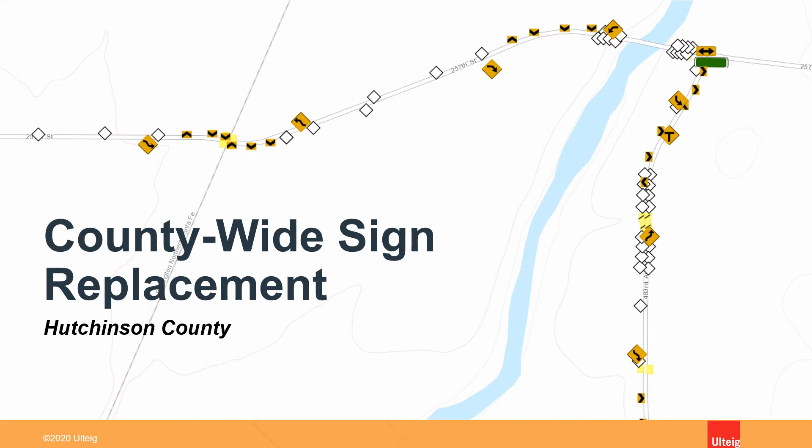Hello everyone, and welcome to the video presentation for the Hutchinson County County-wide Sign Replacement Project Kickoff. My name is Chad Stensland, and I am with Ulteig Engineers. We've been hired by the South Dakota Department of Transportation to administer and design this project.

What is the County-wide Sign Replacement Project? It is a project run out of the DOT Local Government Assistance Office in Pierre. It uses federal safety funds to assist local counties, townships, and towns in replacing and upgrading their existing street signs to current standards outlined in the Manual for Uniform Traffic Control Devices, also more commonly called the MUTCD.

The federal government mandated compliance with the MUTCD back in 2009, and all government agencies have been required to put in place plans to replace all their existing signs to follow new retroreflectivity guidelines. These new retroreflectivity guidelines improve roadway safety and, in turn, limit the liability of the county, towns, and townships.

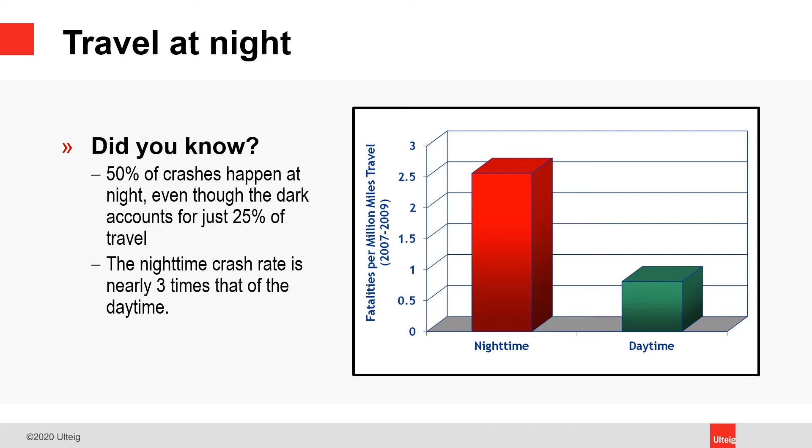Retroreflectivity is important because of the improvement in visibility at night. Although only 25% of travel takes place in dark conditions, 50% of the crashes take place in the dark. Improvements in retroreflectivity can contribute to increased safety for drivers. Retroreflectivity is the property of traffic signs that reflects light back to the driver. The higher the retroreflectivity of a sign, the easier it is for it to be seen from farther away.

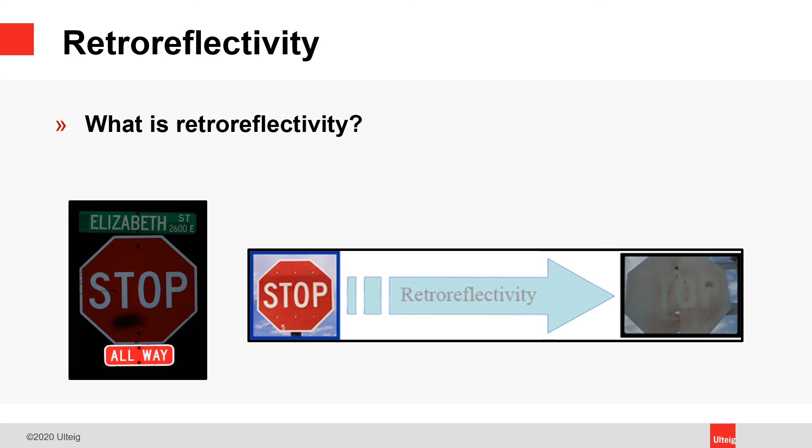As part of the South Dakota DOT's sign replacement program, the signs are not just replaced with newer signs with improved retroreflectivity. The program mandates that we, the designers, also bring all the roads in the participating areas up to full compliance with the following manuals and standards. This is also a function of the requirement of the federal safety funding.

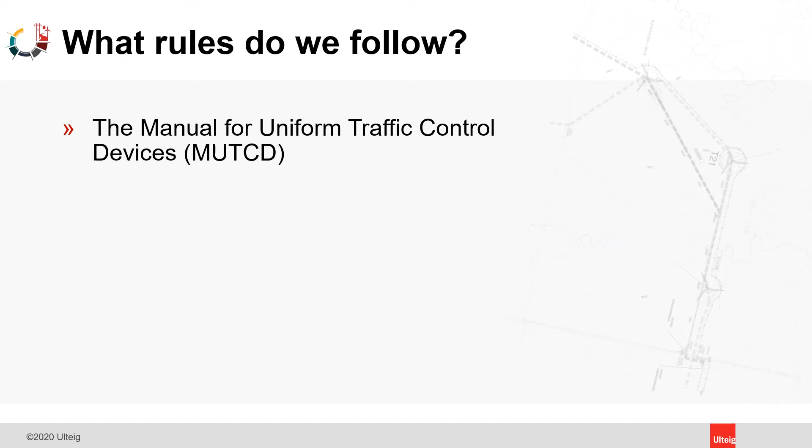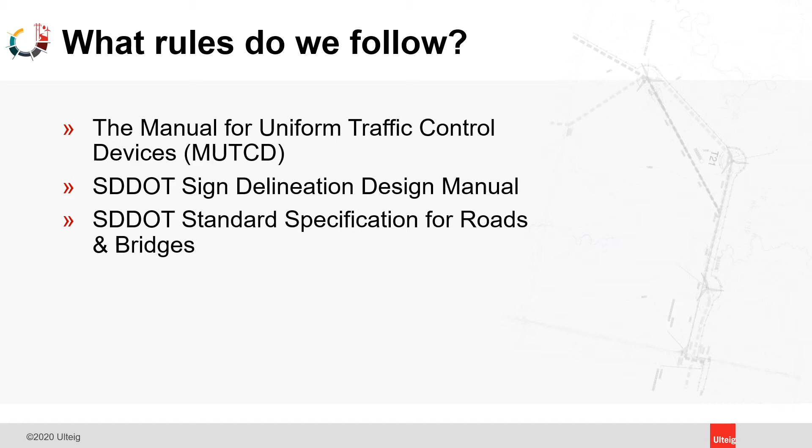For example, the following are a couple of the manuals and guidelines that we must follow when designing this project: the Manual for Uniform Traffic Control Devices, or MUTCD, the South Dakota DOT Sign Delineation Design Manual, the South Dakota DOT Standard Specifications for Roads and Bridges, the South Dakota DOT Road Design Manual, the South Dakota DOT Local Roads Plan, and the South Dakota Codified Law.

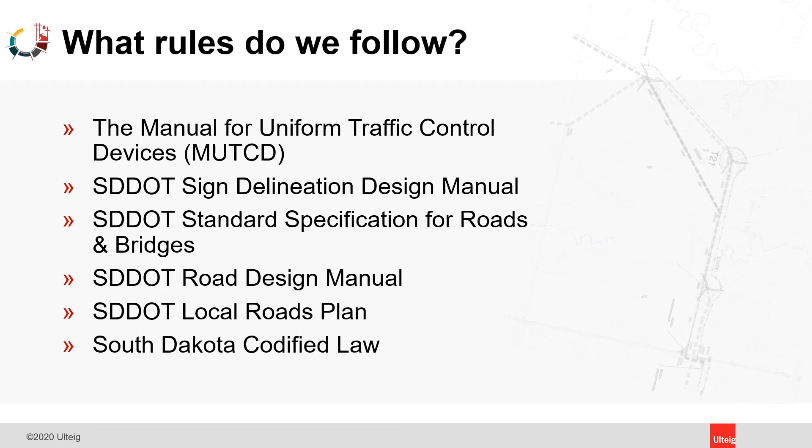So what is it that we do? We do not go out and try to put every sign possible on your roads. We know the funding challenges your organizations face. However, we are bound by the guidance in the previously mentioned manuals and specifications. There is some flexibility in the program to try to fit in with your townships, towns, and counties, but we cannot violate these standards. Here are some examples of some of the things that we will be evaluating and adding to your township, town, or county road.

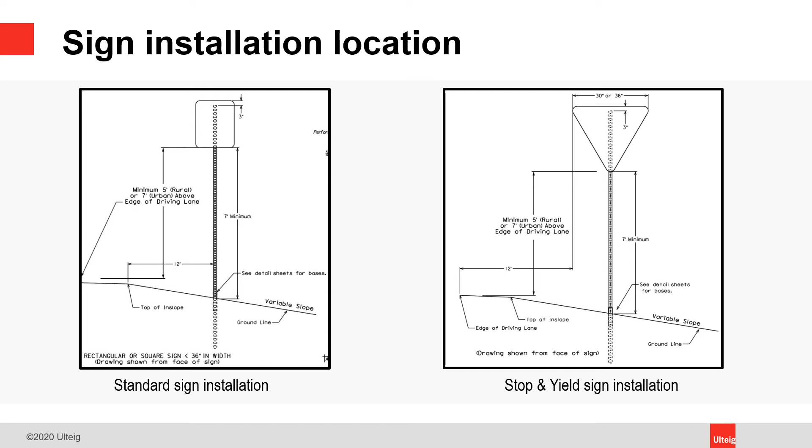New street signs will be installed 12 feet from the edge of the road, with the sign 5 feet above the edge. In towns where there is curb and gutter, the sign will be installed 2 feet behind the face of curb and 7 feet above the top of curb.

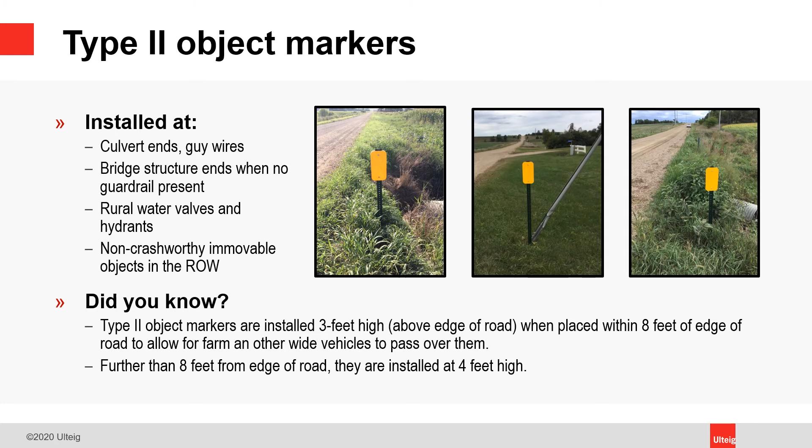Type 2 object markers are installed by hazards in the right-of-way. Items like culverts, guy wires, rural water valves, and hydrants are all examples of things we would put an object marker by. When object markers are close to the roadway, we install them lower than we do in the ditch, so they do not get in the way of farm equipment.

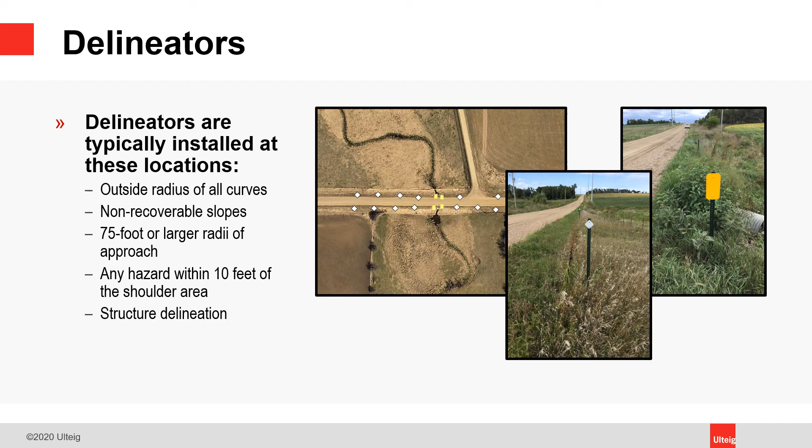Delineators include double-sided white diamonds on posts or round reflective markers. They are used on the outsides of curves, hazards close to the edge of the road, structures, or large radii at intersections.

Structure delineation is the type of delineation you will not see often on the roads. This type of delineation is only installed on DOT numbered bridges without guardrail. When guardrail is present, those locations get a different type of white marker. Like with object markers, delineators that are close to the roadway will be installed lower than they would further down in the ditch, so they don't get in the way of wide farm equipment.

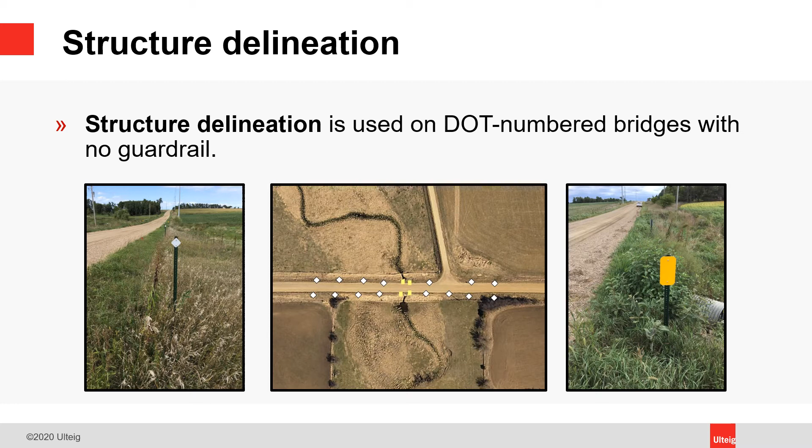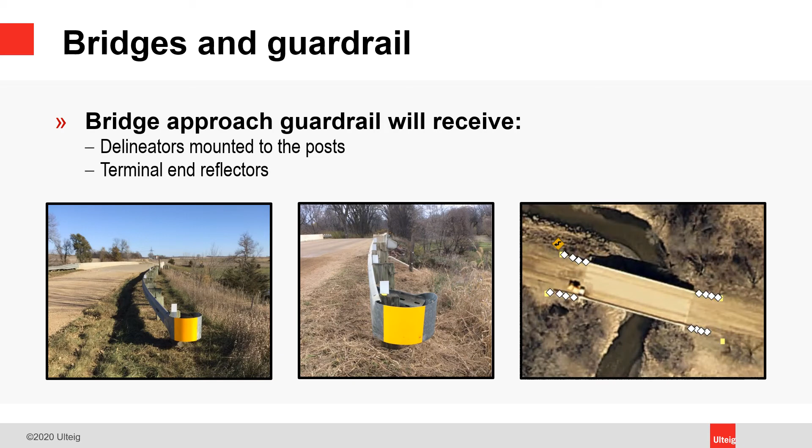As mentioned before, bridges with guardrail will have another type of delineator installed on them to make them more visible. They will also get reflectorized end markers installed at the ends of the guardrail.

When guardrail is not present at the bridge structures, either Type 2 or Type 3 object markers will be installed. If the bridge is narrower than the roadway, then Type 3 markers will be installed. If the bridge is the same width or wider than the roadway, then Type 2 markers will be used. Since these are close to the roadway, the Type 2 object markers will be installed shorter, like previously mentioned. The Type 3 markers will remain tall, but they are on flexible mounts that allow for the object markers to be folded down when necessary.

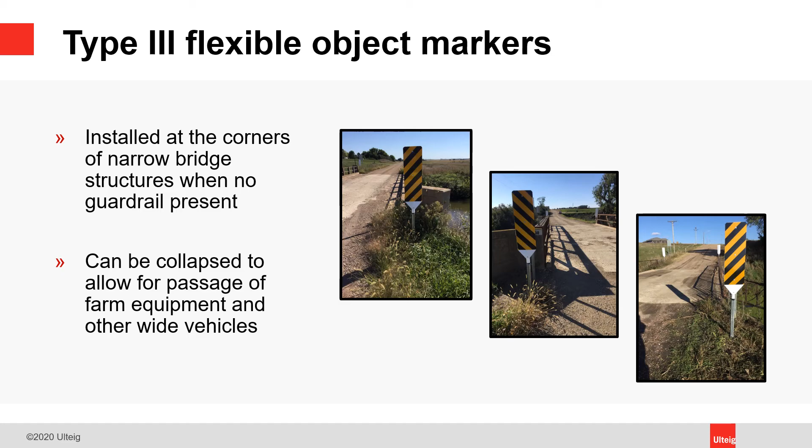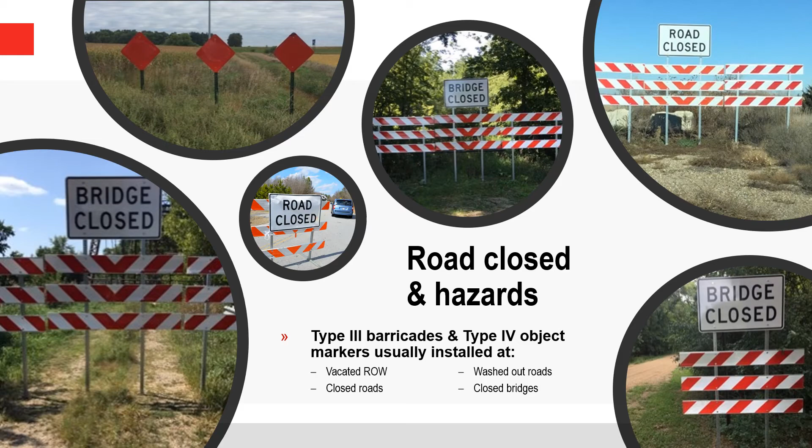Type 4 object markers are the red diamond signs. They are typically installed in sets of 3, and they indicate the end of a roadway. When there is a more substantial or more dangerous hazard ahead, Type 3 barricades are installed the full width of the roadway to ensure vehicles cannot continue. These are typically used with washout roads or bridges that are closed.

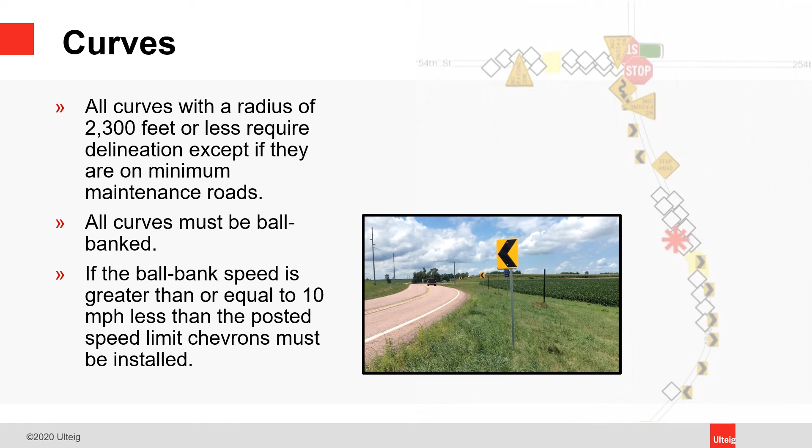One of the places where you're likely to see big change is around the curves and turns. All curves and turns on county and township roads will be ball banked. Ball banking is a technique where the safe speed to negotiate a turn can be determined. These ball bank speeds, in conjunction with the radius of the curve, are what determine what kinds of signs and delineators are needed. Township roads will likely see the biggest change when it comes to curves and turns.

Street name signs throughout the county will be replaced as part of this project. The size of the signs will increase to improve visibility. They will be 12 inches tall in the county and 9 inches tall in the towns, and will consist of 2 signs mounted back to back. Installation locations of these signs will vary depending upon the right-of-way that they are in. The county, township, and towns will be coordinated with to ensure proper spelling and that suffixes and abbreviations are correct. All spellings will be checked with the local agency for accuracy.

One of the last changes you are likely to notice has to do with the signage in uncontrolled intersections that have seasonal sight obstructions. Tall corn in the fields in the fall is an example of a seasonal sight obstruction. South Dakota codified law states that when a driver's view is obstructed at an intersection, the maximum lawful speed is to be 15 miles per hour. This would mean that if there is an agricultural crop in even one corner of an intersection, then a year-round speed limit for that intersection shall be 15 miles per hour and should be signed as such.

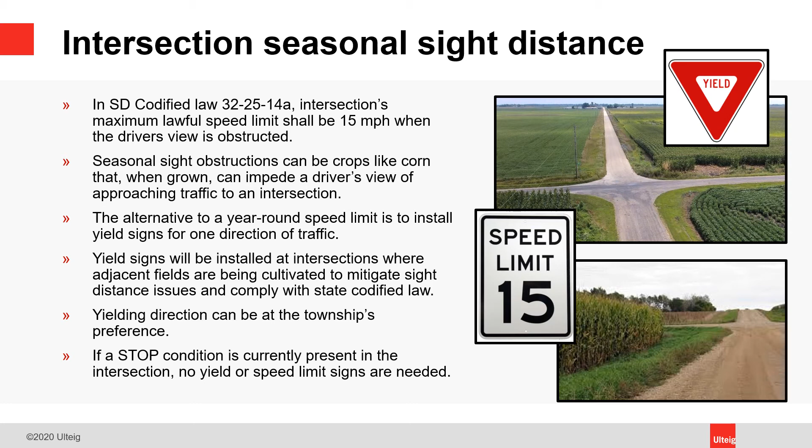However, the preferred alternative in these situations is to install a set of yield signs. The yield direction will be at the discretion of the township. This eliminates the need for multiple year-round speed limit signs at each intersection with adjacent cultivation. This will not need to be done if there's already stop signs at an intersection or if there's a permanent sight obstruction that would require a set of new stop signs. Per federal highway guidelines, non-standard signs cannot be reinstalled as a part of the sign replacement program.

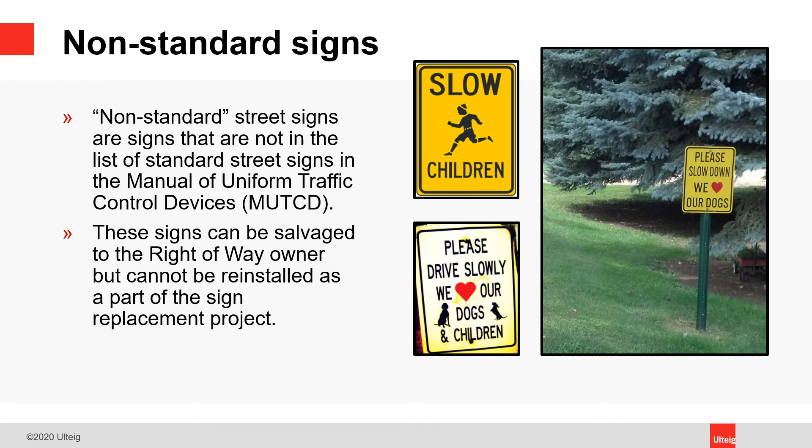Now, on to what we need from you. We have provided you with a packet of information that includes a map of your township or town for you to mark up with the following items, such as speed zones, minimum and no maintenance roads, vacated and closed roadways, school zones and bus stops, truck routes, and for the townships, any maintenance agreements with adjacent townships. This information is essential to us doing our job right. No one knows your roads better than you.

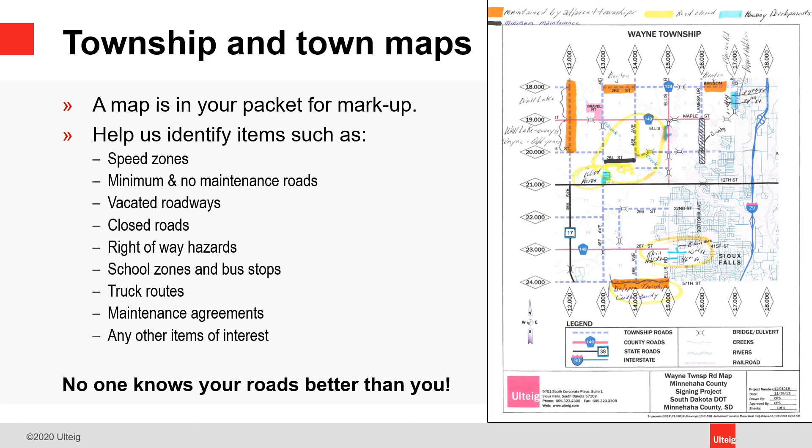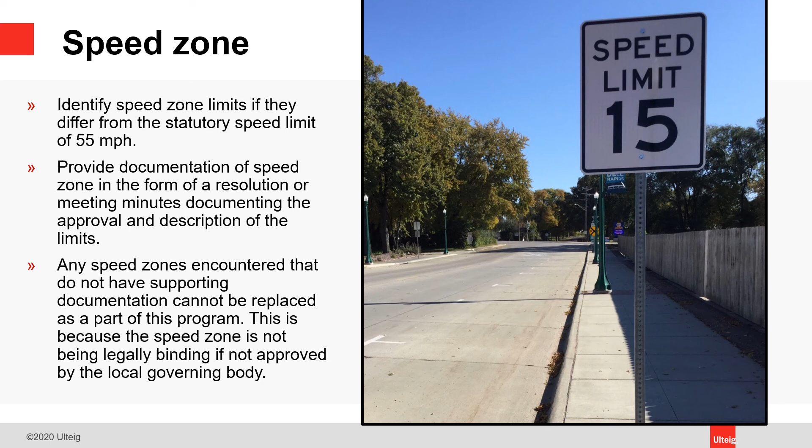When marking speed zones on the map, please be clear where the beginning and end points are. Since speed zone signs are regulatory, backup documentation such as city ordinances or township resolutions need to be supplied, or any existing speed limit signs will be removed and not replaced. Minimum and no maintenance roads should be identified on the maps. These too need to have backup documentation consisting of township resolutions. Without the township resolutions, any existing no and minimum maintenance signs will be removed and not replaced.

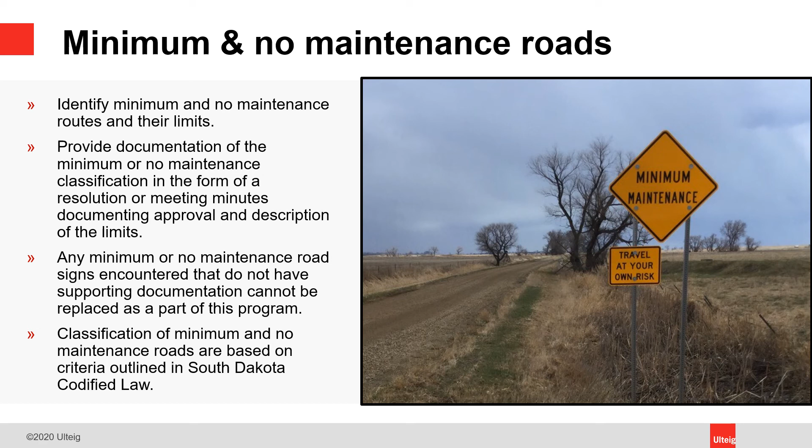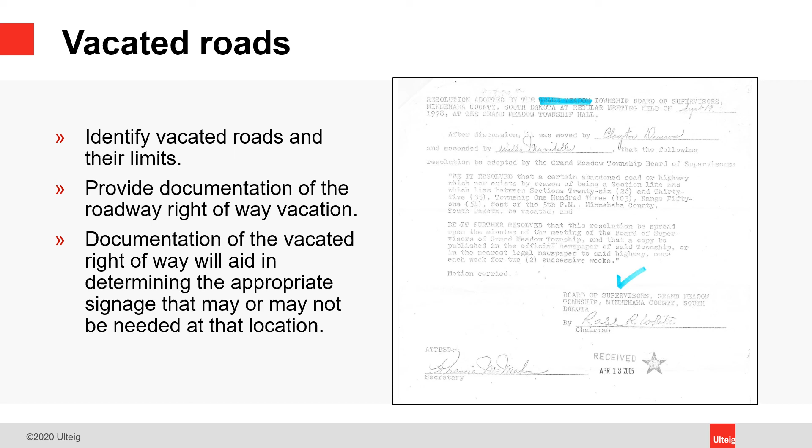Unlike minimum and no maintenance roads, vacated roads are no longer right-of-way and are not signed. However, we do need documentation of the vacation of the right-of-way. Roadway vacations are commonly recorded with the county. Closed roads will also require resolutions from the township stating that the road is closed and what the limits of that closure are.

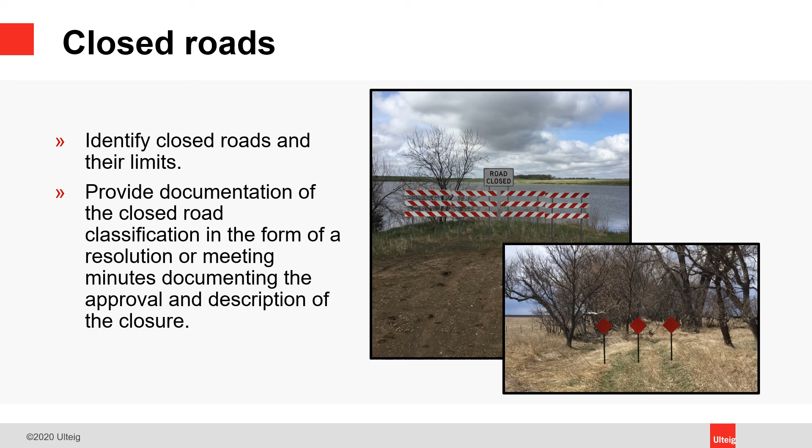In towns, existing safe routes to school and any crossings that are not already marked with school zone signage should be noted in the maps. If there are any old, unneeded school bus stop warning signs, those should be marked for removal. If there are any new locations, those should also be indicated on the maps. Neither of these require any backup documentation to be provided. In towns, identify on the map which roads are truck routes and any streets where the trucks are not allowed.

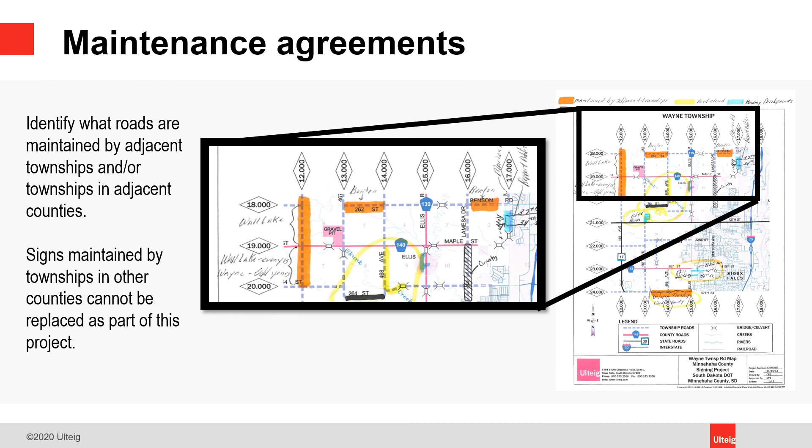The border road maintenance agreements are important to identify, so when we do our design, we know who has decision authority for the signs on those roads. It's also very important to know these agreements if your township is a county border township. This project has no authority over the signs in other counties. We do not require any additional backup information, but we will be cross-checking with adjacent townships, and if any discrepancies are found, we will contact both townships for clarification.